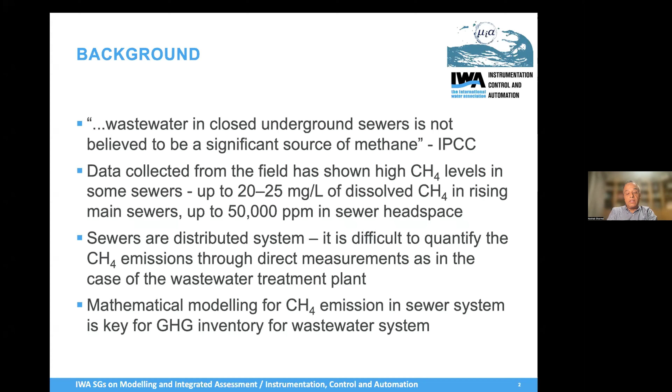So the only tool that we have got is a model, and mathematical models play a major role in greenhouse gas inventory for wastewater systems. We had developed the SeweX model a long time ago. It's a dynamic sewer process model for predicting hydrogen sulfide. Then we realized that methane is an important part of sewer processes, and we added components for methane production from sewer biofilm to that model.

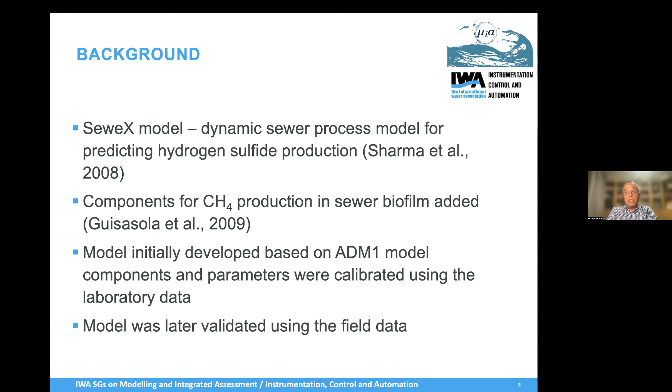That was in 2009, and this model was based on the ADM1 model components for methane production, and the parameters of this model were calibrated based on laboratory data. The model was later validated using field data. So this is just a summary of what is included in the process model for methane generation.

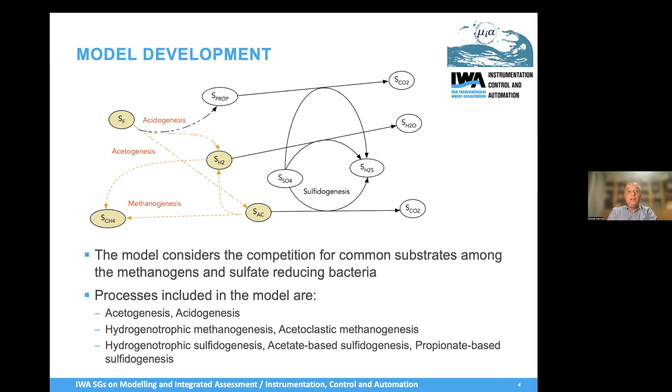We all know that both methanogens and SRBs compete for hydrogen and acetate. That's why we need to consider both processes. This model considers the competition for common substrates, and also includes the typical anaerobic processes like acidogenesis, methanogenesis using hydrogen and acetate as substrates, and also sulfate reduction using hydrogen, acetate, and propionate. So these are the processes included in this model.

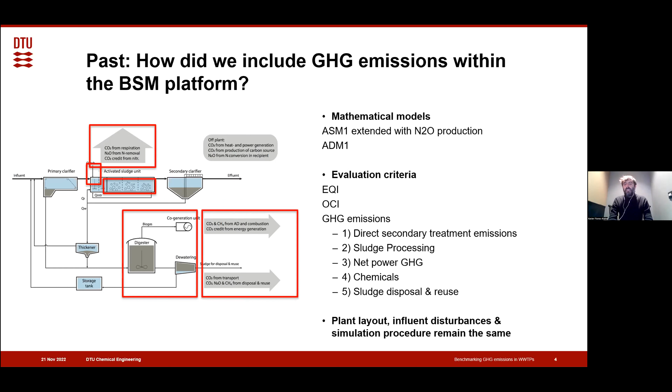The third category was off-site emissions, for example, those emissions related to energy consumption, for example, aeration and mixing. The fourth category are emissions derived from chemicals, for example, for process intensification, like ethanol. And the fifth category was emissions from sludge disposal and reuse. The plant layout, the influent disturbances, and the simulation procedure remain the same.

So these are the simulation results that we obtained when we implemented in the BSM2 3 types of control strategies. The first strategy was to modify the dissolved oxygen set point in the activated sludge reactor. The second was to modify the percentage of TSS removal in the primary clarifier. And the third was to change the temperature in the anaerobic digester, so move from mesophilic to thermophilic conditions. At the beginning, we used just 2 indexes to quantify how efficient these controllers were: the effluent quality index and the operational cost index.

One of the things that we could see is that higher DO set points improve effluent quality because we had better nitrification efficiencies, but of course increased the cost, with more aeration, so it was more expensive to operate. The second was to change the efficiency of the primary clarifier. We had more revenues derived from methane production because more COD was sent to the sludge line instead of being burned in the aerobic reactor. But this changed the COD to nitrogen ratios and ended up damaging denitrification processes.

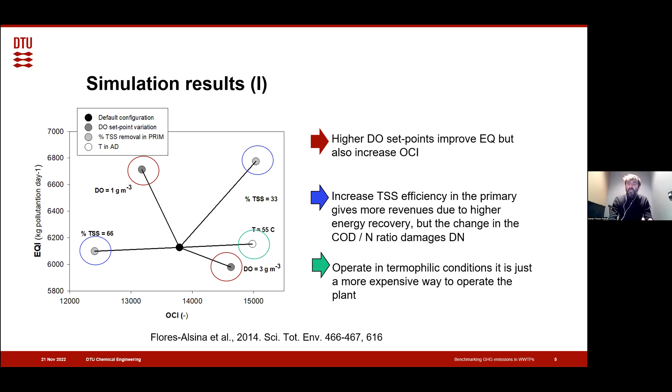The third category was when we changed the temperature in the anaerobic digester from mesophilic to thermophilic conditions. Basically, we didn't see that much effect, it was just more expensive to operate because the methane was already well optimized. So this was using traditional criteria. So what is going to happen when we include this third dimension, greenhouse gas emissions? These emissions were quantified as kilograms of CO2 equivalents per day.

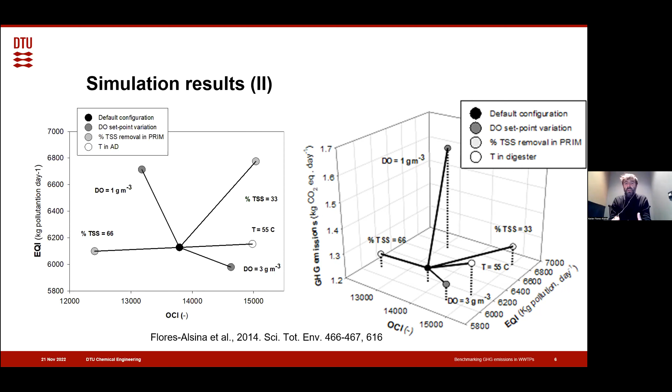So we could see these three-dimensional representations where we could compare cost, effluent quality, and emissions, and see synergies and trade-offs when implementing certain controllers. A specific example is when you decrease the dissolved oxygen set point in the activated sludge reactor. Of course you decrease the operational cost index. When it comes to emissions, you decrease the off-site CO2 emissions, but increase the N2O production. And since N2O is about 300 times stronger than CO2, it affects a lot your whole greenhouse gas emission index. So that's why you have this outlier in this representation.

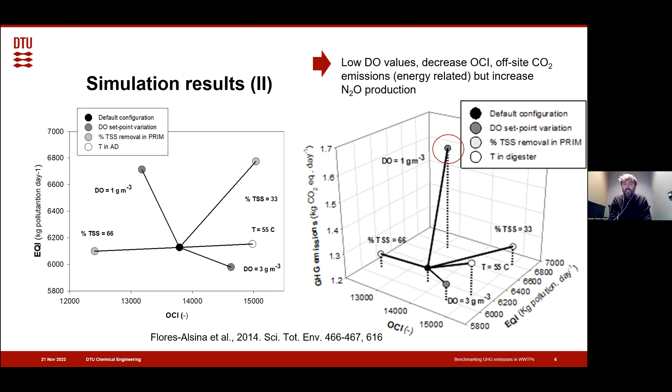About the present, this implementation has been recently upgraded to account for greenhouse gas emissions and nutrient recovery options. This work was led by the guys from the Autonomous University of Barcelona, and both DTU and LUT were collaborating with it. The work expanded the scope, so we modified the influent disturbances. So we include phosphorus, for example, and full cationic and anionic description.

Also, we modified the plant layout. So we moved from an MLE configuration to an A2O configuration. So we had to add 2 anaerobic reactors to promote the growth of PAOs. Also, we modified the mathematical models. So the core model in the first implementation was ASM1, and this one is ASM2d.

And then, of course, we modified the model interfaces to ensure that we had continuity between the sludge line and the water line. We modified the evaluation criteria to include all these different elements. And then we expanded the scope of controllers. So we include control strategies, but also potential recovery strategies.

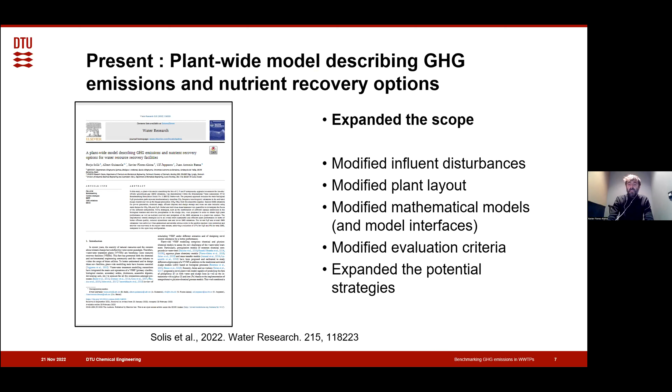So with this new platform, we could have these very nice representations where we have a mapping of the different elements coming to the plant, for example, how much carbon, nitrogen, and phosphorus, and then what is the fate and the transformation of these elements. So for example, how much of the carbon is transformed into CO2 or methane, how much of this carbon ends up in the effluent, or how much of this carbon ends in the sludge.

The same for nitrogen. So how much of this nitrogen is nitrified and denitrified, and how much of this nitrogen ends up in the effluent or in the sludge as part of the biosolids.

More information, for example, these are very nice representations of what is going to happen when you increase the degree of complexity when operating the plant. So A0 is the plant running in a baseline mode, and then A1, A2, A3, 4, and 5 are different controllers, for example, ammonia controllers, or adding different chemicals, or including phosphorus recovery, like with struvite. And then we could see how the effluent quality index changes and how much the operational cost index, the N2O emissions, or the whole quantity of greenhouse gas emissions change.

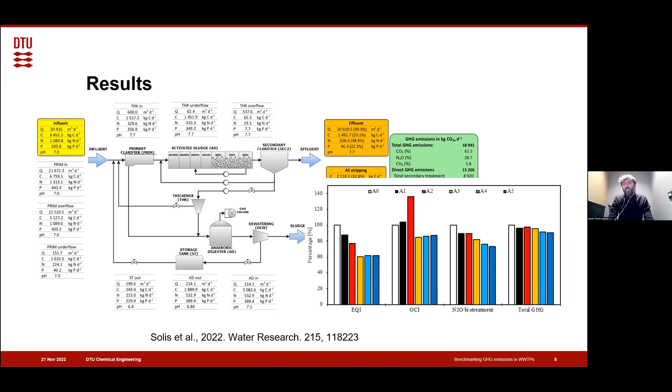Future. So what we are going to do now is try to use these models that we developed in the past for a new project that has been recently granted by the Danish MUDP. And this is going to be quite relevant in Denmark because I think it's going to be one of the first countries where N2O is going to be taxed. So water utilities will have to take a closer look at N2O emissions, reduction of these emissions or potential treatment. And this is exactly what we're going to do in this project. So is it possible to treat these emissions, and how much is it going to cost us?

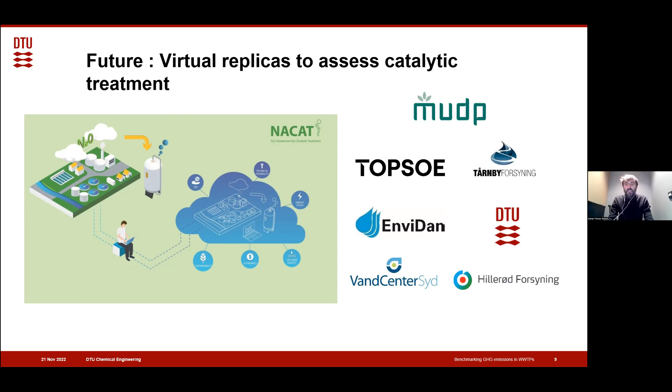So in the consortium, we have 3 utilities, the company providing the catalyzer, consultants, and also DTU doing some part of the research. And this schematic represents quite nicely what is going to happen. So we have the wastewater treatment plant, and then there's going to be a team of modelers creating these virtual representations with the models that we have developed in the past. And then, of course, we're going to use these models to run scenarios where we take into account the multi-objective nature of the problem, including effluent quality, cost, and greenhouse gas emissions.

This is a more accurate representation of what is going to happen. So some of these tools are going to be used for mass balancing and data reconciliation. We're going to quantify these emissions, and then with these computer models, we will develop simulation tools and then run a scenario analysis.

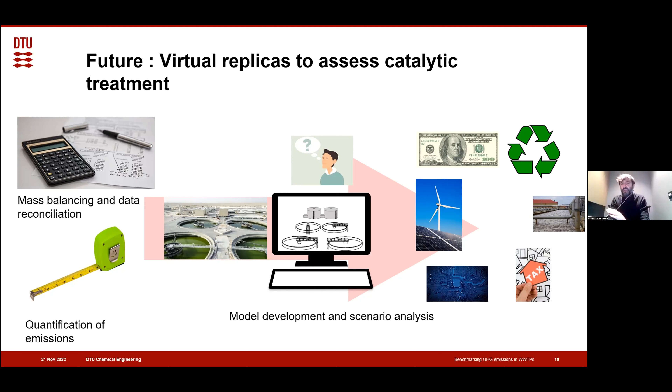And that is going to be quite interesting, because we could answer questions such as: I can operate the plant in a certain way that I produce more N2O, but perhaps I can treat it. And then how much is it going to treat? How much is it going to cost treating this N2O? And then how do these different criteria correlate to each other: effluent quality, cost of treatment, cost of operation, N2O emissions, etc.

A bit of conclusions and take-home messages. So the addition of greenhouse gas emissions, I think it's a very interesting add-on, because it gives a better informed decision about the sustainability of certain operational strategies or controllers in wastewater treatment plants. One of the things that we saw when we ran these exercises and simulations is the risk of energy-related optimization. For example, when you try to operate the plant in a way that it runs in a low energy consumption, that could lead to a massive increase in N2O, and then this has a dramatic effect on the whole greenhouse gas index in the plant.

I think it's also very important to consider both waterline and sludge line, otherwise you have an incomplete picture of what is happening. A nice example was when you change the efficiency of the primary clarifier. You have effects in different ways, in both the activated sludge reactor, but also in the anaerobic digester. And since some of these observations and tools are very specific, we developed these tools in order to make them general. So we put them online, people can download them, and of course, adapt them to the specific problems.

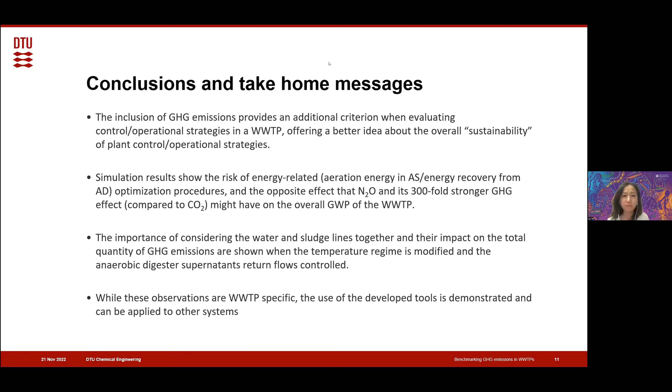Thanks, Xavier. It's really interesting and nice to see how the benchmark modeling provided an integrated assessment tool that not only considers N2O emissions, but also the energy and the cost associated as well. So I think there are two questions already asked in the Q&A. You can have a look to see if you can answer them live. Otherwise, we can leave it to the Q&A.

So we've built this framework. Because all of these operating conditions and process conditions have been directly linked to risk of N2O emissions in the literature, we took a look at what has been reported through full-scale and lab-scale experiments for the various influencing factors, then used a knowledge-based approach to dynamically generate a risk score that tells us why we have emissions and what we can do to reduce them. And then we can also use machine learning to predict what these N2O emissions are. What is interesting is that we're combining a knowledge-based approach with machine learning, which is a data-driven approach. The knowledge-based part removes the black box around the machine learning, because if we see N2O emissions going up, we know why, and we know what we need to do to bring them back down. So this is what we're essentially implementing in our N2O risk decision support platform.

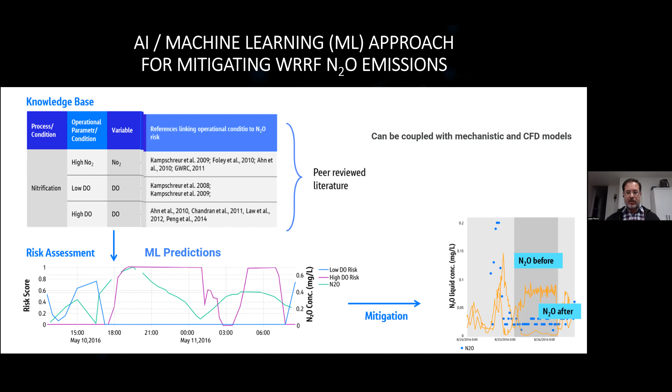So we start using this approach to first start accounting of the N2O emissions and being able to screen and prioritize sites. And the problem with these emission factors that are currently used and are widely accepted for accounting of N2O emissions is that they don't account for the site-specific conditions. They don't account for what's happening in the reactors. And if we use machine learning, it does allow us to do this.

And here we're showing how we've used a machine learning model trained with data from a completely different site to estimate the N2O emissions for another site. And we can see that it comes much closer than what the IPCC emission factors are able to do.

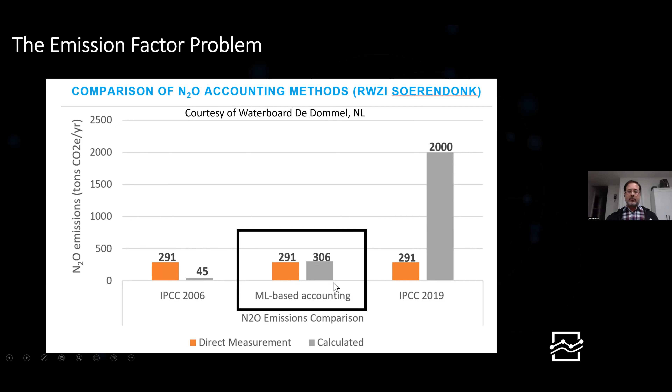So knowing this, we've been able to start implementing this and taking a look at a large wastewater treatment plant in Northeast Illinois here in the US. And we're able to take into account the site-specific and the process conditions to be able to look at the risk profile for a whole year, and then also be able to take a look at what the N2O emissions are for that year. And so for any given reactor or lane, we can calculate what the N2O emissions are.

So we're able to do this for each pass in the lane, and we can see how the risk profile can change, and also the N2O emissions can change. So it's important that you're looking at each part of the plant to be able to calculate what the total emissions are. And once you've been able to do this for several sites, then you can start to see where you need to be prioritizing action.

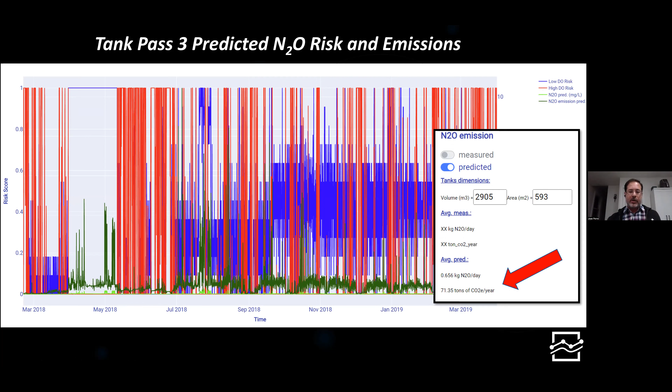In terms of measuring and reducing N2O, we first want to start measuring, and it's not just as simple as getting these N2O results. You first have to decide on which method you want to be using, whether it's a hood method or using the sensors to measure in the liquid, then combining process knowledge and N2O knowledge to know where you want to be measuring, and then verifying any differences there might be in the different reference spots where you want to be measuring. But once you've been able to get a month of measurements, you can train a machine learning model.

And then once you've done that, you can actually take a look at the historical data, because we know that there might be seasonal variation. We know that there might be changes in operation that might cause differences in the N2O emissions profile. We don't have to measure for a whole year to see this change. We can use a trained machine learning model and then be able to look at the historical data.

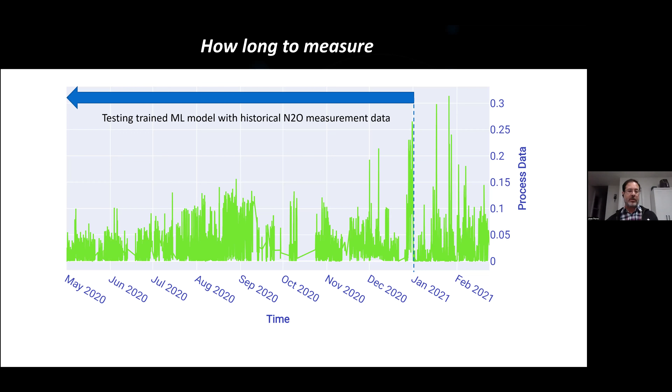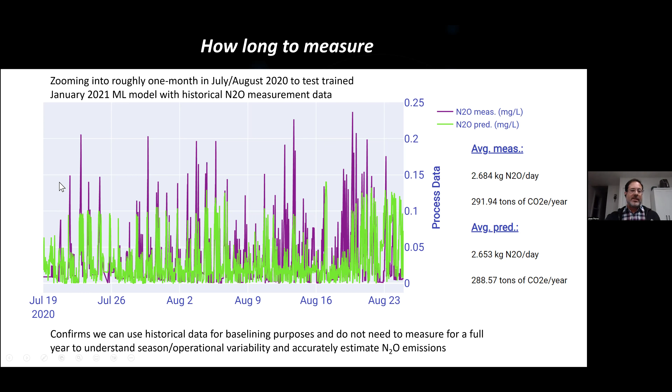And we've tested this approach, and what we wanted to see always is that the machine learning model is capturing the dynamics properly. Sometimes it's not perfect. It doesn't quite get some of these peaks all the way, but these are very short periods of time. So as long as it's mainly getting it for the whole period, and it is actually capturing these dynamics, then we know we can have confidence in this model. Because if we were seeing that it's predicting peaks at different times and it's just coincidentally calculating the same emissions, then we know that the model is not actually correct.

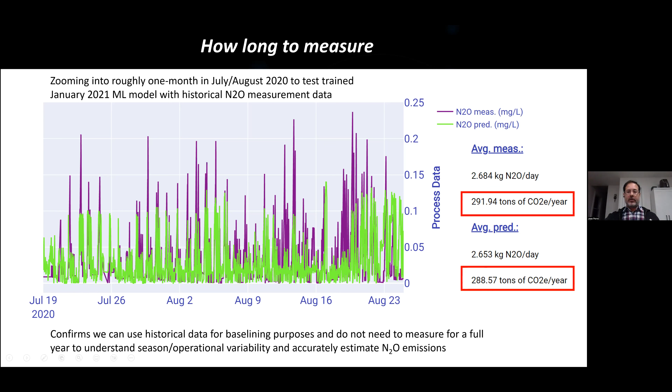But we can see that we are able to calculate very accurate emissions using this approach, 292 versus 289, which for our purposes is more than enough. So once we've been measuring, we can also take a look at the risk, and we can verify that the N2O is happening when we are predicting risk. And in this particular case, it was due to risk of both low DO conditions, which is this blue, but also a risk of high DO conditions, which is this red here.

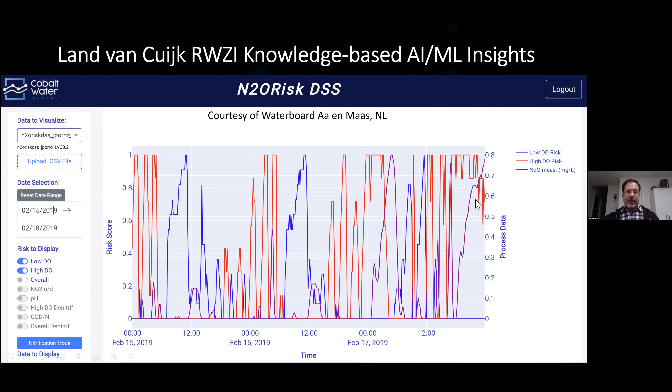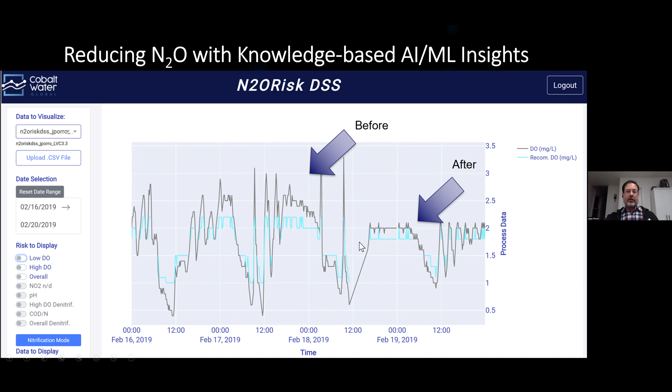So looking at this, we can propose control actions, and we can see what the recommended DO would have been before and after. And once they're implementing changes, the idea is to fine tune the control, not change the control, but fine tune it so that they can be closer to this blue line. So they were able to make those adjustments and bring the DO closer to the blue line, and we can see the direct impact that has on the N2O. So in this particular case, we saw a reduction close to 90%, but we've also in other sites in the Netherlands and the UK been seeing reductions of 90%, 80% of the N2O.

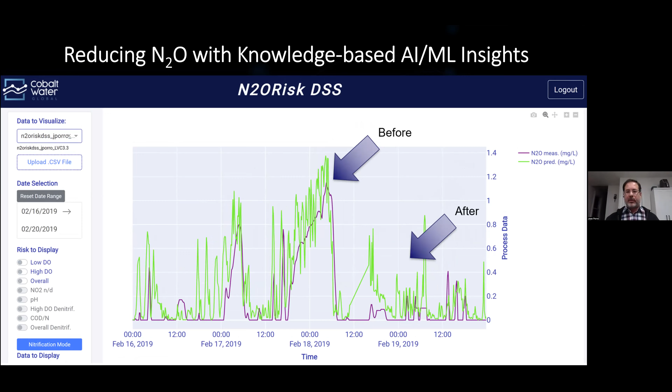So once you've reduced the N2O, you're not done. You want to be now monitoring the process, because we know those reductions can easily go away if things start to change and as seasonal variations occur. So just like we're able to use a trained model to look at the historical data, we can use it to start to look forward.

And we've seen that in some cases we can get close to up to 5 months with fairly good accuracy with the machine learning model, but this can change from site to site. And the idea is that there's actually 1 or 2 times during the year that you'd want to go back to verify the accuracy of the model. And if it's gone out of range, this is where it can be retrained to bring it back in line.

The other thing that we can do, because at this point we have a library of over 50 machine learning models, we can look at the process conditions and say that another model might be better based on the current process conditions, and we can replace it until measurements can be done to retrain the model.

But we're also looking at using the machine learning models to look in the parallel lanes. So we're not just looking at one lane, because we know that there can be significant differences from one lane to another. So this is important when monitoring the process and making sure that the N2O isn't coming back up. And if it is, making sure that you're making the adjustments to bring it back down.

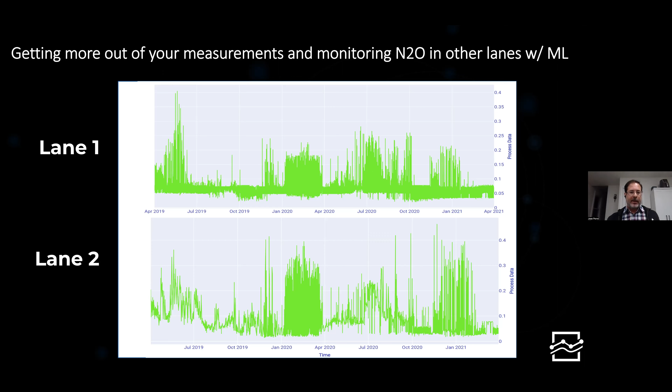But what's also interesting is we can integrate these insights, these AI and machine learning insights, with other tools like the ASM mechanistic models or process models, because then we can predict what the N2O emissions are just using ASM1 state variables. And then based on the recommended control actions, we can test them using the process models.

The CFD biokinetic models which Wim showed, we've been able to integrate our AI machine learning insights with this. I think we presented this in Watermatex in 2019. So it's an interesting application of the AI machine learning approach. But we can also implement these insights in any digital twin context, and also implement it in various advanced control solution platforms.

So the N2O reduction journey can start now. We've seen how we can reduce N2O, and there's really no reason to wait at this point. There's definitely plenty that can be done. And we see that AI and machine learning can help take you through this journey.